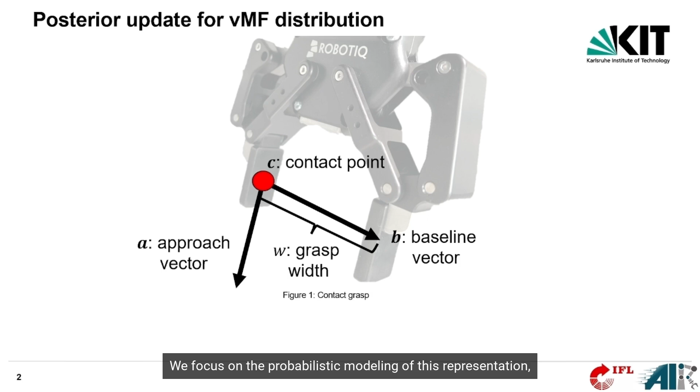In this work, we present vMF-Contact, a novel architecture with uncertainty-aware 6-DOF grasp detection framework based on probabilistic contact grasp representation. A contact grasp is defined by a contact point, baseline vector, approach vector, and grasp width. We focus on the probabilistic modeling of this representation, accounting for both aleatoric and epistemic uncertainties.

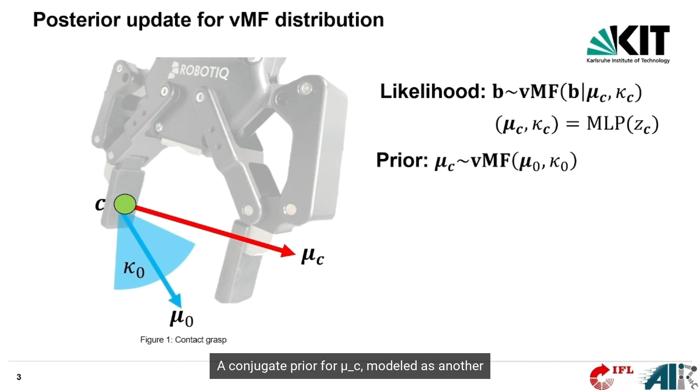Specifically, we model the likelihood of the baseline vector using the von Mises-Fisher distribution, which is parameterized by the mean direction μc and concentration κc, predicted by a shared MLP based on the encoder features ZC. A conjugate prior for μc, modeled as another vMF distribution with parameters μ0 and κ0, represents prior knowledge about the baseline vector's direction. A reasonable choice of an informative prior direction can be the negative surface normal on the object, considering antipodality for grasping.

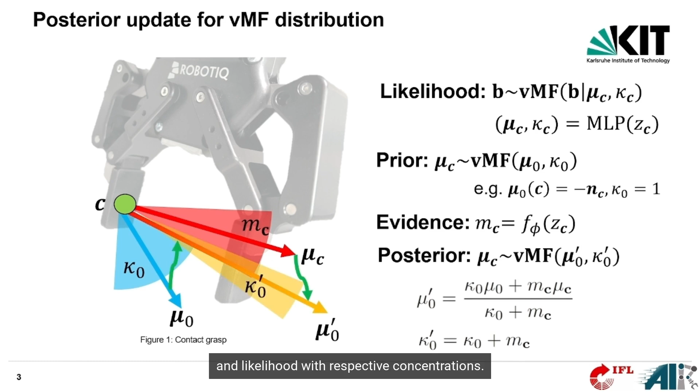The evidence MC represents the belief on observed point feature, which is predicted typically by a normalizing flow. To this end, the posterior updates combine prior and likelihood with respective concentrations. For novel contact feature with low evidence, the posterior remains conservative and aligned more with the prior.

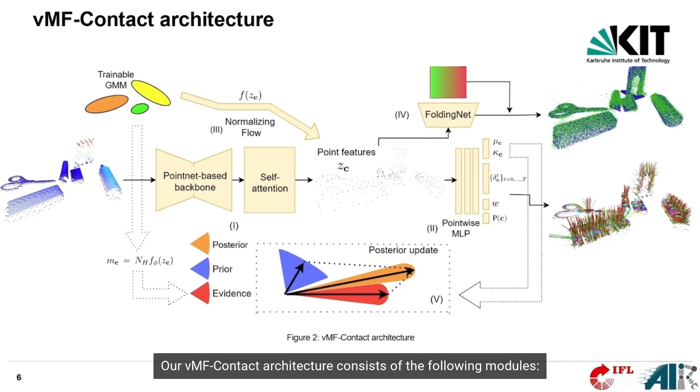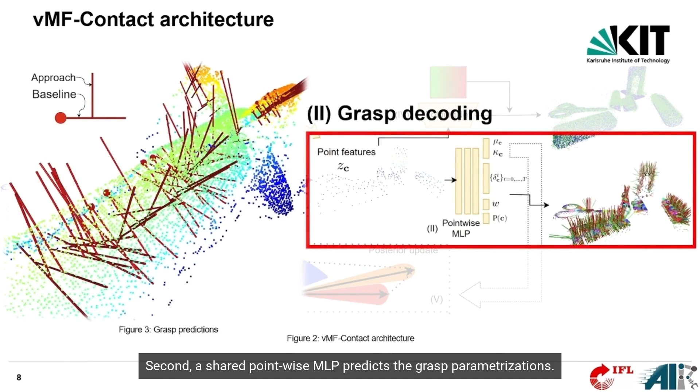Our vMF-Contact architecture consists of the following modules. First, the raw point clouds from a single camera view go through the PointNet-based backbone, giving the point features ZC. Second, a shared point-wise MLP predicts the grasp parametrizations. Then, a normalizing flow attempts to fit a trainable GMM to the point features, providing evidence predictions MC. Finally, the evidence serves the posterior update with the likelihood from MLP predictions.

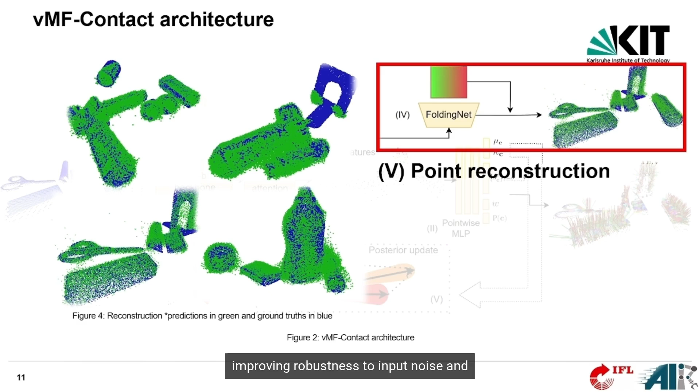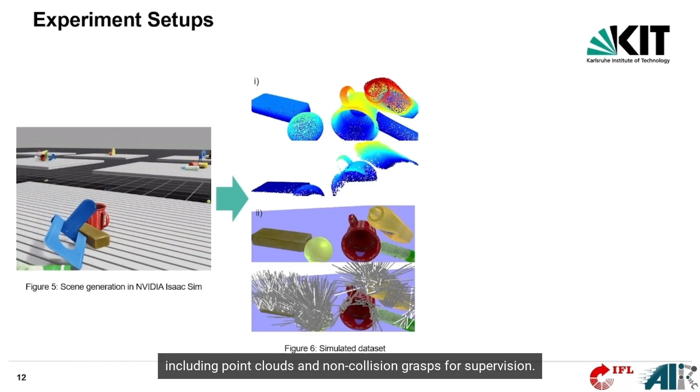Moreover, we extend 2D feature reconstruction and evidential deep learning to the point cloud-based reconstruction, improving robustness to input noise and enhancing uncertainty quantification as well as accurate grasp detection. For data collection, synthetic data is generated including point clouds and non-collision grasps for supervision. Notably, the training scenes contain only 12 distinct objects, each with a randomized presence.

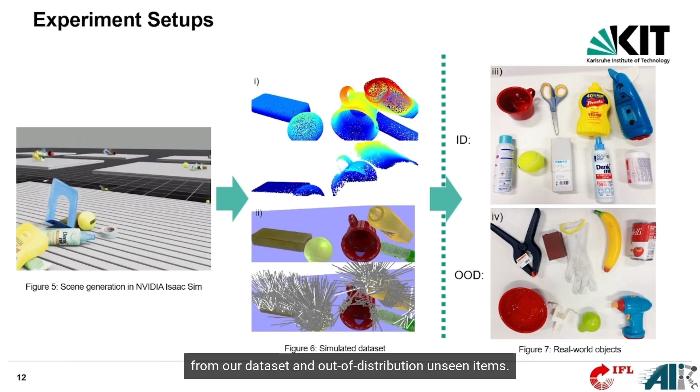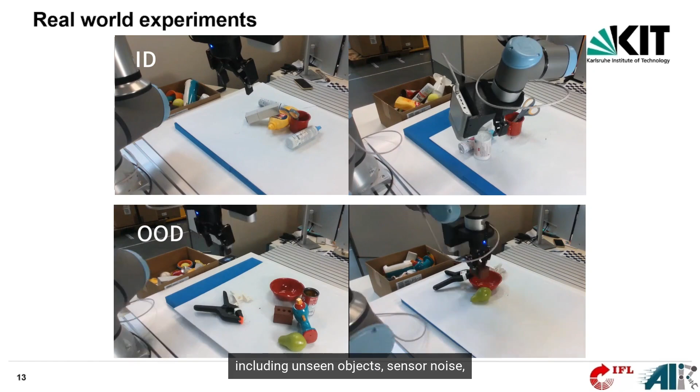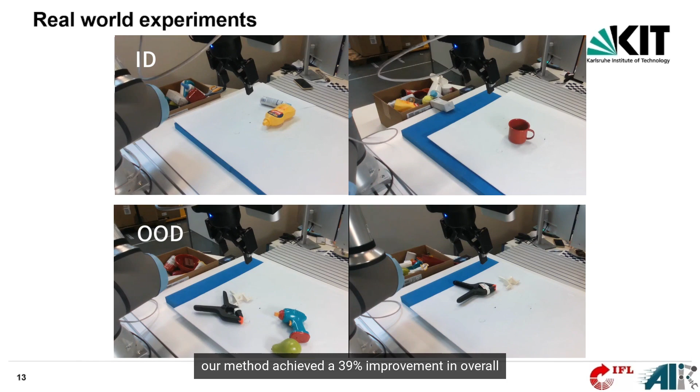In real-world experiments, we evaluate in-distribution objects from our dataset and out-of-distribution unseen items. We validate the effectiveness and generalization capability of vMF-Contact, without any sim-to-real adaptation. Comparable performance is observed across in-distribution and out-of-distribution scenarios, including unseen objects, sensor noise, and varying geometric and physical properties, such as deformable items. Notably, with reconstruction and uncertainty-based grasp selection, our method achieved a 39% improvement in overall clearance rate compared to baseline approaches.